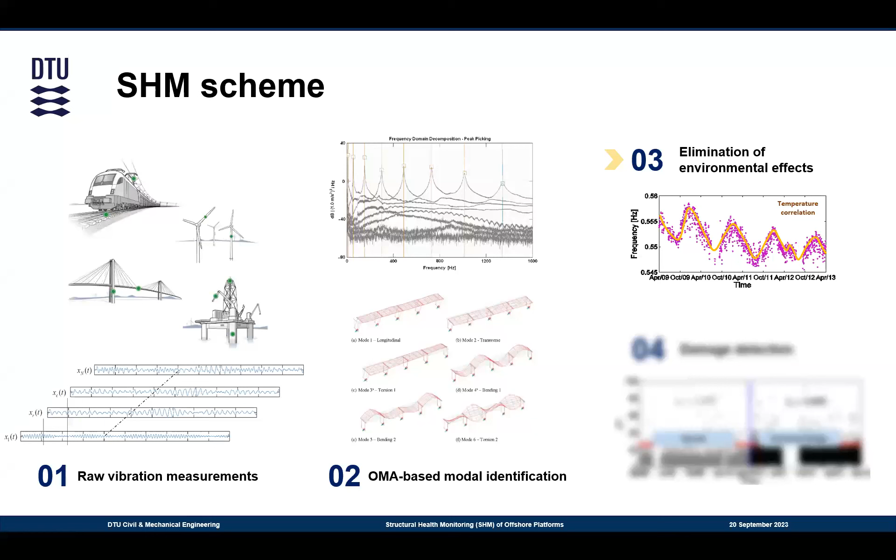But we are very well aware that there are different parameters that might affect the modal properties, such as the environmental and operational variability. So in order to make those safe conclusions, we need to eliminate those parameters first. And after we do that, we can proceed to damage detection or other techniques.

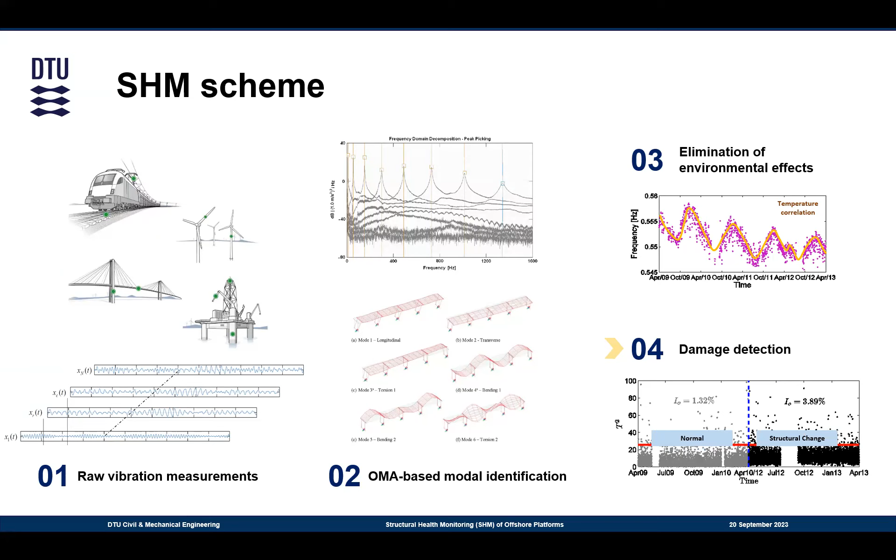So as I said before, we apply this concept in an experimental study. We have this monopile specimen at the DTU campus, which consists of a wooden mast and a steel topside. The idea of my PhD was that I would start with this experimental model, and then at some point during the PhD, I would get some real data from offshore platforms, from companies that collaborate with DTU, but that never happened. So we're kind of forced to continue with this experimental model.

Anyway, the measurement system consists of four 3D sensors called geophones that we mount on the steel topside that you can see on the left. And then we split the monitoring campaign into 20-minute measurements. So we get approximately 72 different data sets per day.

And then the wooden mast: we use wood so we can go out there and damage the structure and then be able to apply different damage detection techniques. Specifically, what we do is we induce some cuts, as you can see there. We start from 2 millimeters, and then we increase the cut depth every 2 days by another 2 millimeters. So we go from 2 to 4, 6, up to 10.

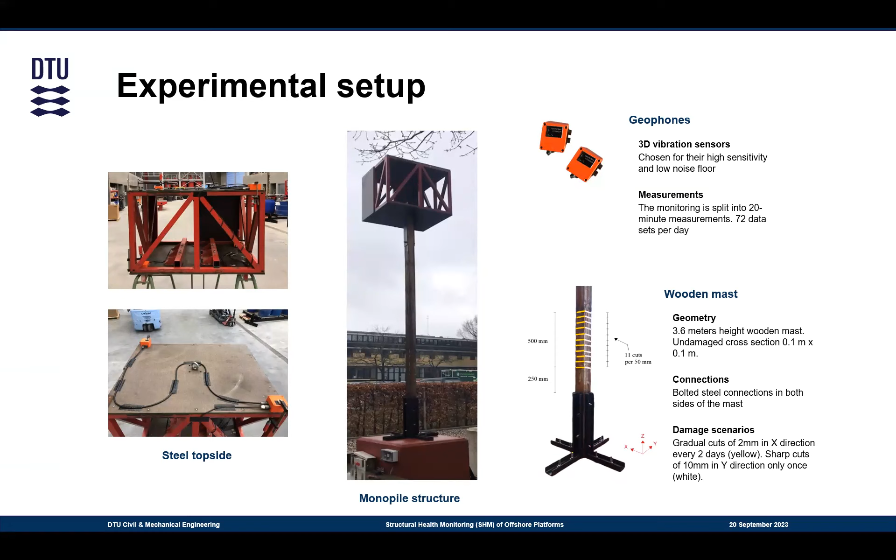And then in the last day of this damage period, we damage the structure on the other side, but this time directly to 10 millimeters. So this is the concept. And then in the modal identification, we see that the natural frequencies of the first 2 modes vary around 1.2 hertz in the undamaged state of the structure.

And then when we introduce these cuts, the gradual cuts in this direction of the mast brought a gradual decrease in the natural frequencies of the first mode, whereas the other cuts, the sharp cuts in the other direction, are mainly correlated to a sharp decrease in the natural frequencies of the second mode.

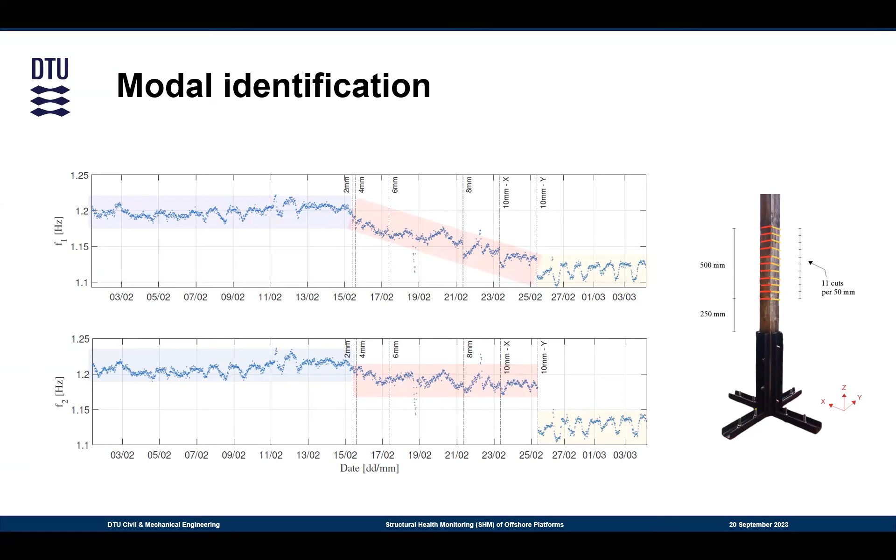And then, as I said before, this is the first indication that there might be a damage presence, because we know that the stiffness is associated with the natural frequencies. So this drop in the natural frequencies alerts us that there might be a structural degradation, but as I described before, we would like to eliminate the environmental parameters first in order to make safer conclusions, and we do that by using principal component analysis.

So what we actually do here is we take the identified natural frequencies in Y, and then we calculate the covariance matrix and use singular value decomposition of this covariance matrix. So we obtain the singular values and the singular vectors in U. PCA states that most of the data's variance is explained in the first singular values. So if we take the first, say, M singular values and the corresponding M columns

from U, then we can define the PCA estimate Y hat, where most of the variability that we see in this plot should be included. So we would like to isolate the variability from the environmental parameters in Y hat. So in the next step, we just exclude it from the identified natural frequencies by taking the residual error. So if we do that, here we see the example.

So we split the monitoring campaign into 3 parts: the training part, the validation, and the prediction period, where we apply this methodology I described before in the training part. So we calculate the covariance matrix. We take the first M principal components as they explain 99% of the variance of the data we have, and then we calculate the PCA estimate.

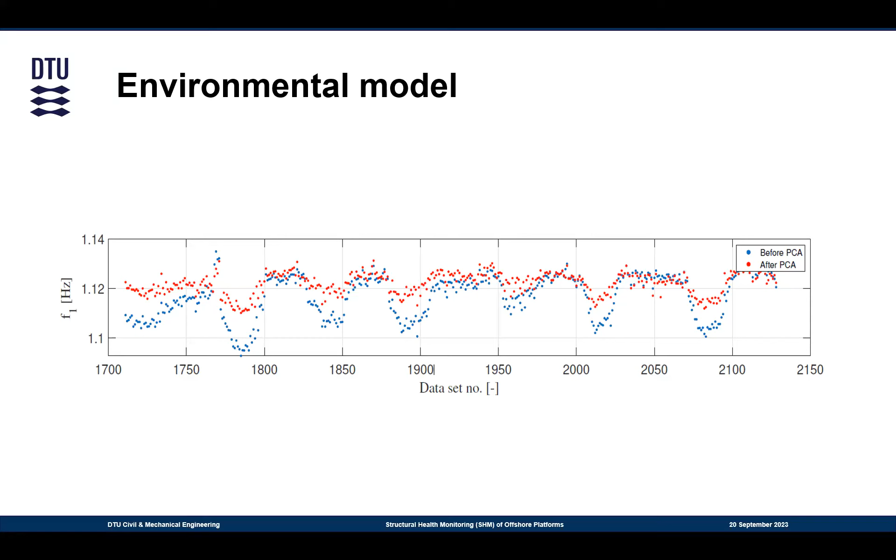And then if we go one step further in the methodology and calculate the residual error and finally the corrected values, if we plot these corrected values, which represent the natural frequencies but now with the environmental effects eliminated, we see that the red curve has a way more stable evolution, and we can see it more clearly if we zoom in on the last part, where after the application of PCA, most of this fluctuation due to the environmental effects is now gone. This is also confirmed by the standard deviation of these values, which is reduced by 50%.

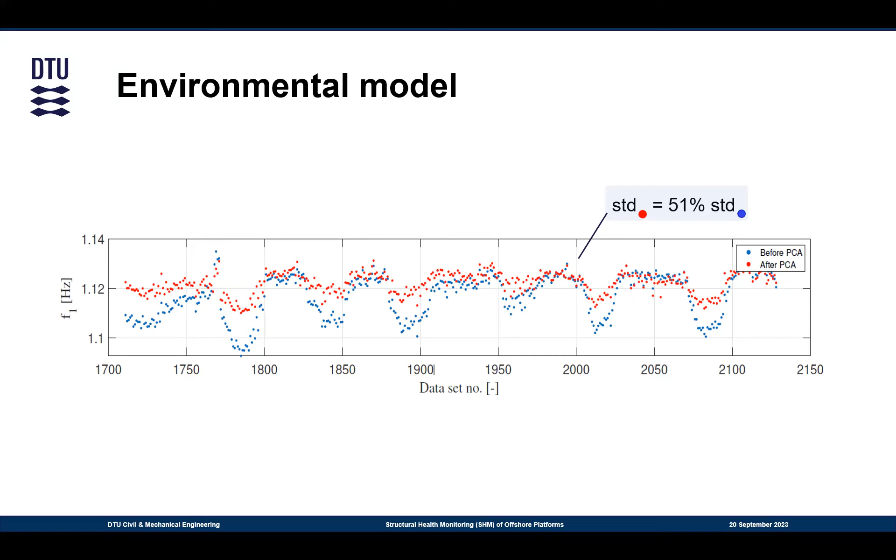So now we have corrected the identified natural frequencies, and we would like to apply a damage detection scheme to identify the damage cases we induced in the wooden mast. For that reason, we use control charts, which are a statistical tool for quality control. And what we actually do here is we calculate a T-squared index for all the observations that we have, and we compare it with a control limit UCL.

And what we see here is that for the undamaged state of the structure, only 0.1% of the observations exceed UCL, but when we started damaging the structure and keep increasing the cut depth, we see that more and more values of this T-squared index exceed the limit, and actually after the 6 millimeters of those cuts, all of these values exceed UCL, leading to a successful damage identification.

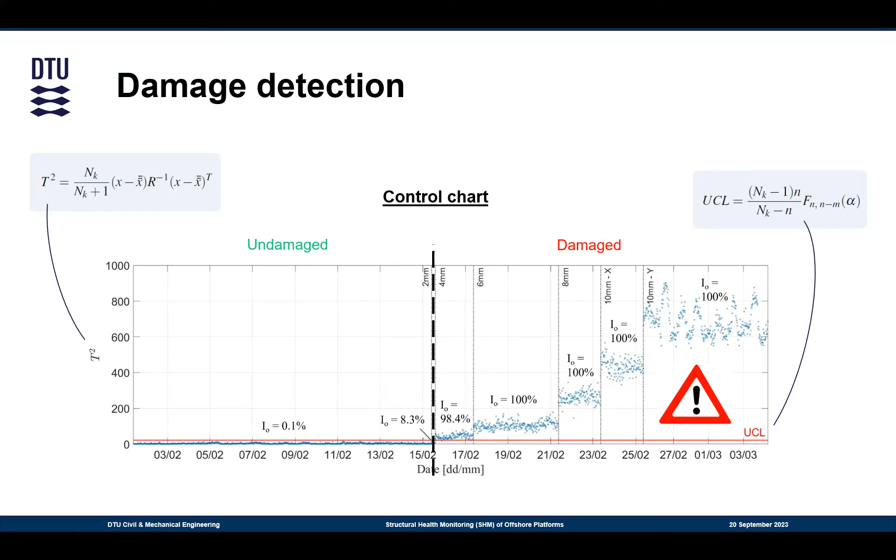So that was the first part. Let me now move to the second one, which is the sensor fault detection. As I said before, we would like to make sure that the data we obtain are reliable, and we propose a method here in order to identify errors within sensor data.

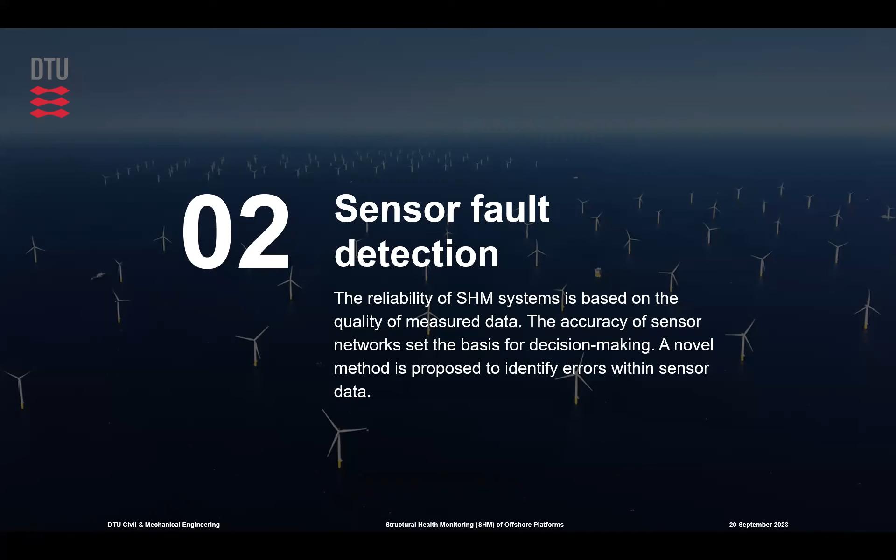This method is based on the rigid body assumption, which states that any limited part of any structure, like the top side of an offshore platform, for example, or simply the top side of our little specimen, can move as a rigid body. And that means that if this body can move freely in the 3D space, it has 6 degrees of freedom that can describe its motions: 3 translations and 3 rotations.

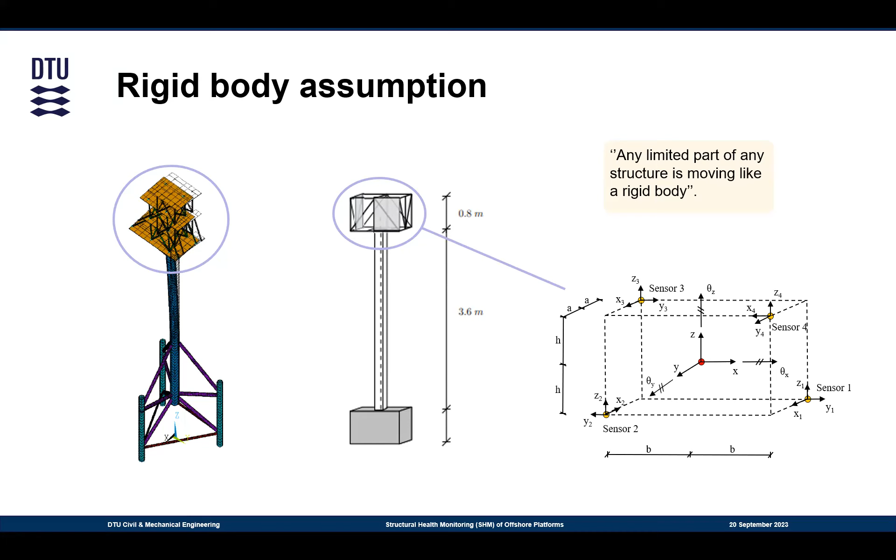And if we take this top side, we also, of course, know where we have placed our sensors. So we have 4 3D sensors, meaning 12 channels, 12 signals. So now we can establish a relationship between the measured response in Y and the actual DOF movement in D. We can solve this equation in a least squares sense. So we obtain D hat.

And then the concept of this method is that since we consider this top side as a rigid body, we have more signals than the measured quantities. In simple words, we have 12 channels, 12 signals to measure 6 degrees of freedom. So this system of equations is overdetermined, and that means that if we have an error in some signals, or we have a faulty sensor, we can simply eliminate it and continue the analysis without problems.

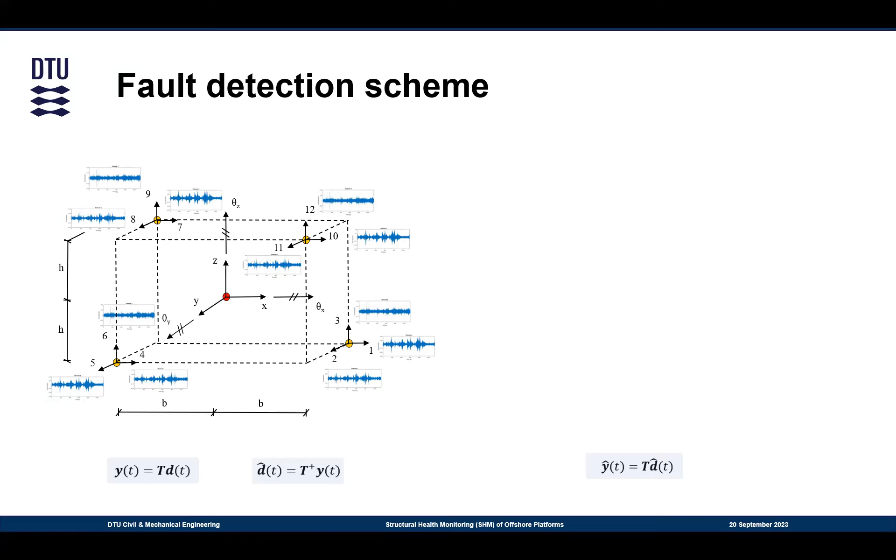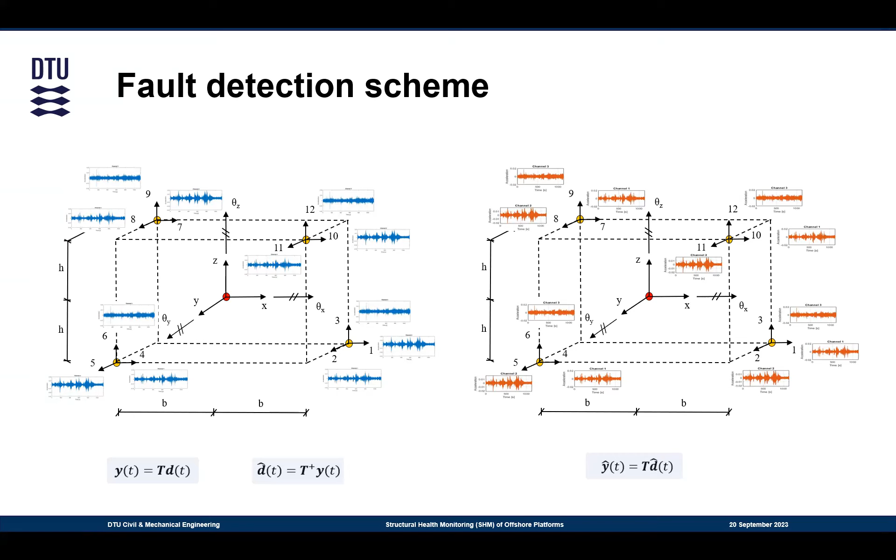So now, if we take this estimate for D and put it in the first equation, we obtain the so-called synthesized signals, which are the signals we approximate, where we assume that most of the error, most of the sensor noise, is now eliminated. So what we have is 2 sets of signals: the measured responses and the synthesized signals. If we take the residual between those, we define the error estimate, which is the primary tool to identify errors in signals.

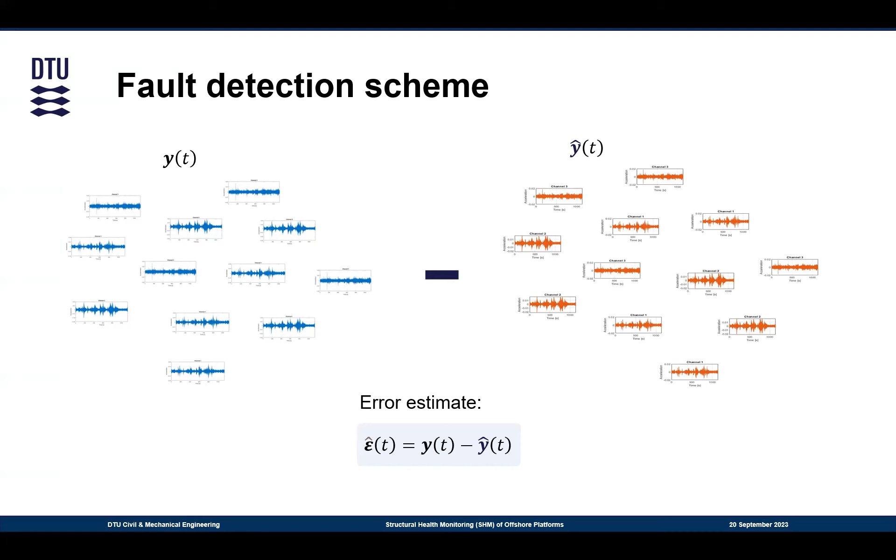So let us see some applications. Here we have the most common errors in vibration testing. We can have bias, for example, where we have an offset in our signal, or we can have gain, where the signal is amplified by a factor B, or we can have a complete failure, for example, in this case, where the sensor stops working.

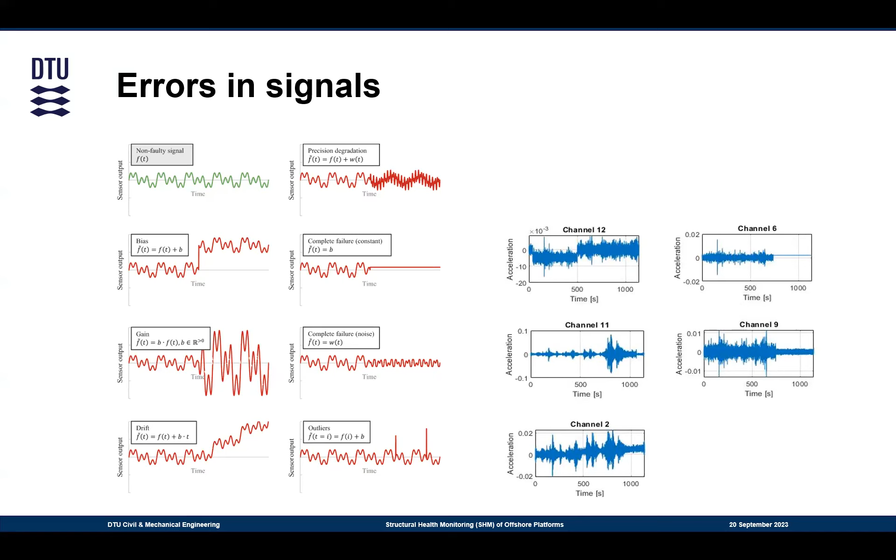So what we do here is that we take those errors and we try to simulate them in the gathered responses that we have from our experimental model. So for example, here you see that we have a bias in channel 12, a complete failure in channel 6, and so on and so forth. And here we have some results.

On the upper left, we see the case where we have no errors in signals. And so we see that the time evolution of the error estimate remains relatively low. But when we introduce some faults, like bias in signal 3 or gain in signal 2, we get those peaks in the error estimate in the corresponding time window where the fault is present.

And the same thing applies in the next row, where we have the drift, the constant failure, or the noise failure. So we conclude that this error estimate over time is an effective tool to identify those errors in the signals.

But we are not really satisfied with this solution because, as I said before, we get 12 signals every 20 minutes. So it's not optimal to go through every signal that we get to see if we get some peaks in the error estimate. We would like to automate

this procedure, and we do that by an outlier detection, where we calculate the standard deviation of the error estimate for all the signals. So we have one plot instead, and what we see here is that in the upper figures, the standard deviation is around 0.2 times 10 to the power of minus 3, where we have no faulty signals. But when we introduce errors, like for example, the gain in signal 2 or the complete failure in signal 10, we see that the standard deviation peaks. So we identify those signals as the faulty ones.

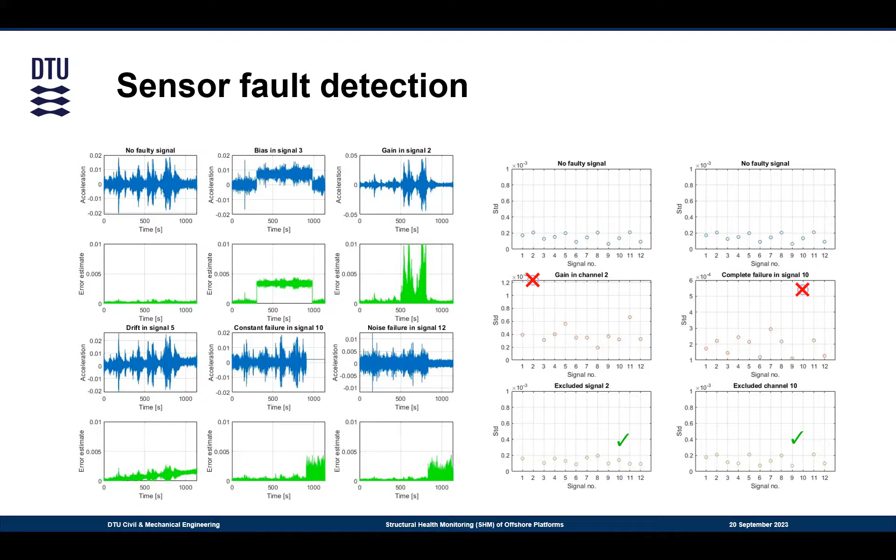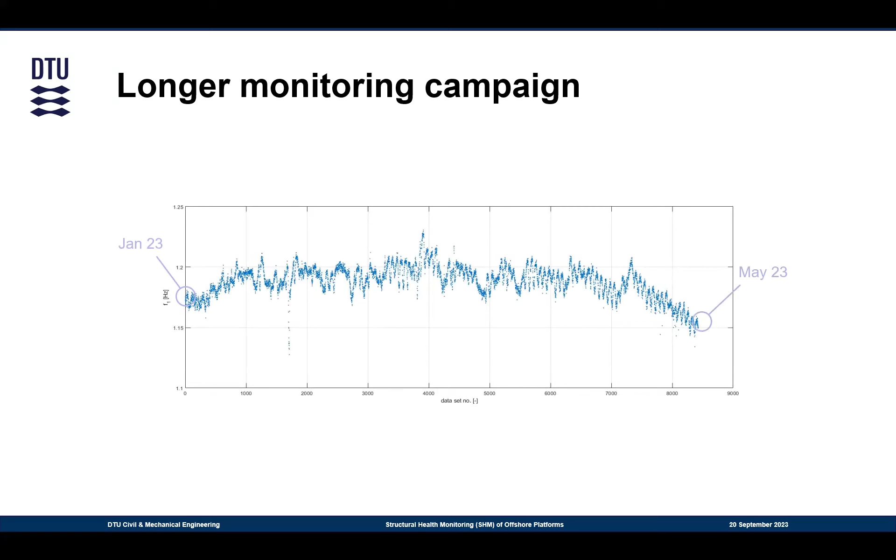Okay, and now the last part about the future research activities and the next steps of my PhD research. Let me start with the first part of monitoring. We saw before that we have this monitoring campaign, and here we notice that this campaign only lasts for 1 month. So what we want to do here is to extend this monitoring campaign to at least 1 year of monitoring. And we have already started doing that. So we started this January to monitor this specimen again. And here I have some data until May. So we have 5 months of data of natural frequencies here.

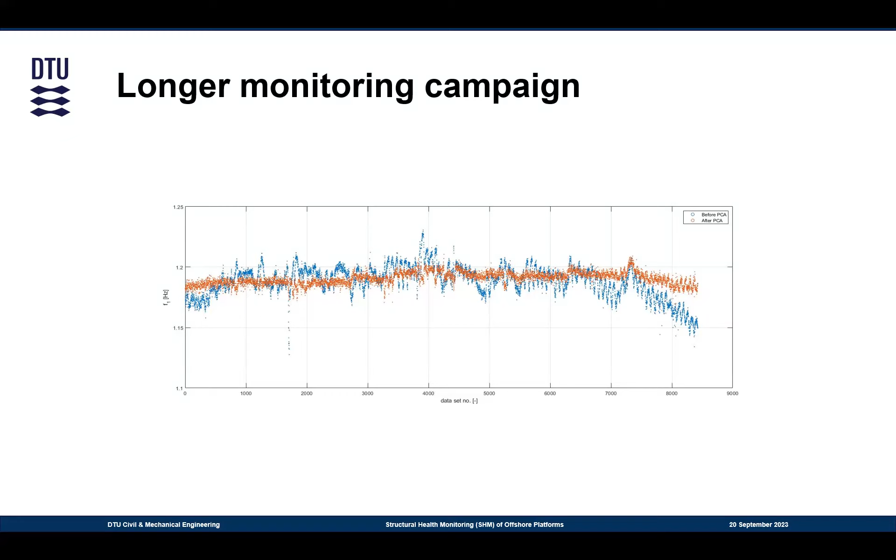And if we repeat the procedure of the environmental model, we once again train our model. In this case, I used data from less than a month, and we get this result over here, where we see that again most of the variability due to environmental conditions is gone. So our plan here is to have a longer monitoring and also to train our model in a longer period. So we include the seasonal variability, the cold temperatures during the winter and the hot ones during summer, and we build an effective environmental model. So then we can base our damage detection or other ideas that we might have on a very robust foundation, let's say, of this solid environmental model.

And then in the second part about the fault detection, we obviously want to assess the effectiveness of the method. So in other words, we would like to assess how big, let's say, how extended the faults would be, meaning this b parameter. So here I have an example of the gain detection where we test different values of the gain coefficient B to see the effectiveness of the algorithm. And what we see here is that when we have a gain with a coefficient bigger than, let's say, 2 or maybe 1.7, we get a high success rate, whereas when the coefficient is around 1, it's not that effective. And we would like to do the same and assess how long, for example, this bias or this gain should be, or how many outliers we should have in order to have an effective fault detection.